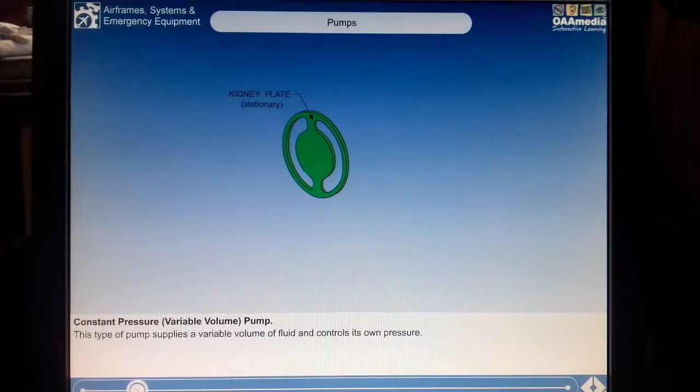The pump is made up of a number of components. There is a stationary kidney plate, so named because of the two kidney-shaped slots cut in it. The fluid supply from the reservoir enters the pump through one slot, and the pressurized fluid exits by the other.

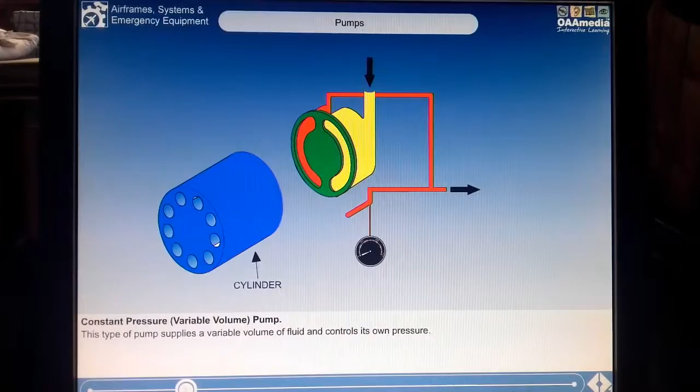The cylinder block is rotated by whichever source is driving the pump. Cut into this block are a number of cylinders. There is direct metal-to-metal contact between the rotating cylinder block and the stationary kidney plate. This contact is lubricated by hydraulic fluid at system pressure.

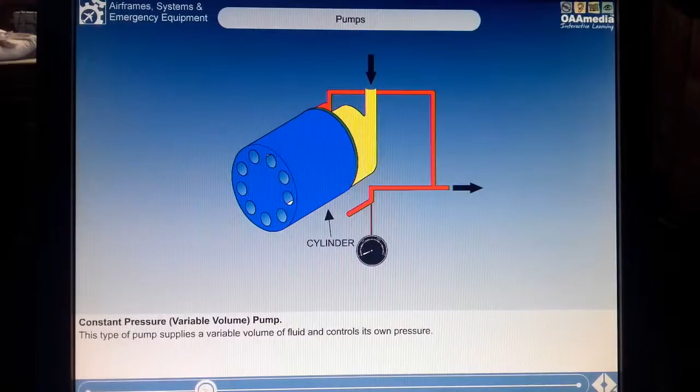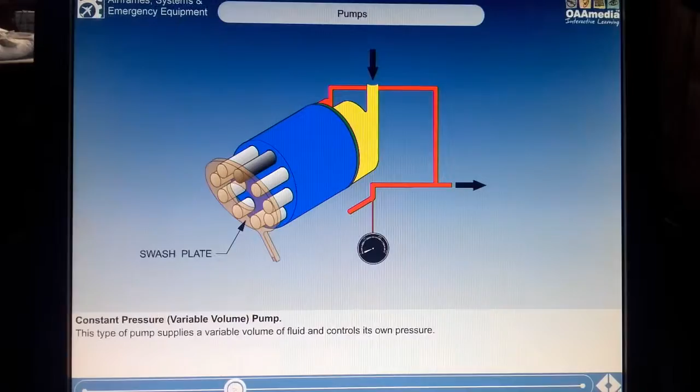Each cylinder has a piston fitted into it. The pistons are connected by shoes to the non-rotating yoke or swash plate. Again, lubrication is by hydraulic fluid at system pressure.

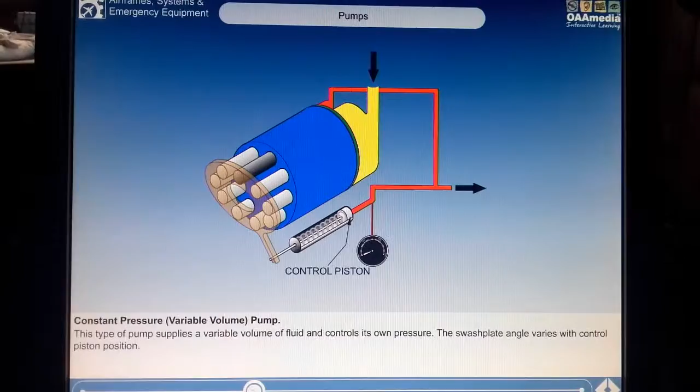The angle of the swash plate, and thus the piston stroke, is varied by the position of the control piston. The control piston has pump outlet pressure on one side of it and a spring on the other.

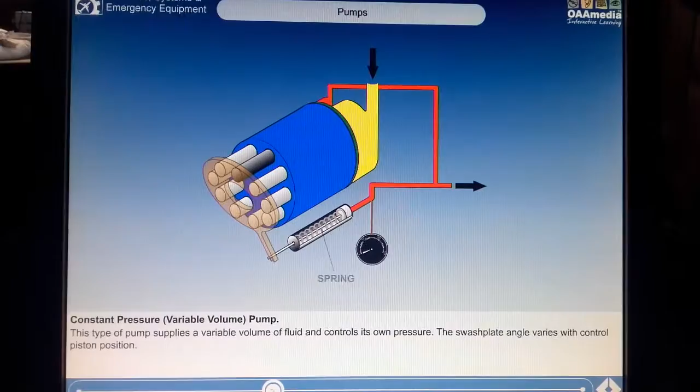With the pump stationary, there will be no hydraulic pressure, so the spring will push the control piston fully to the right, and the swash plate angle will be maximum.

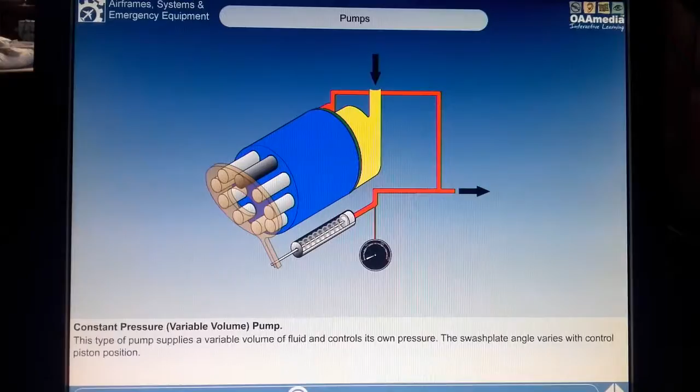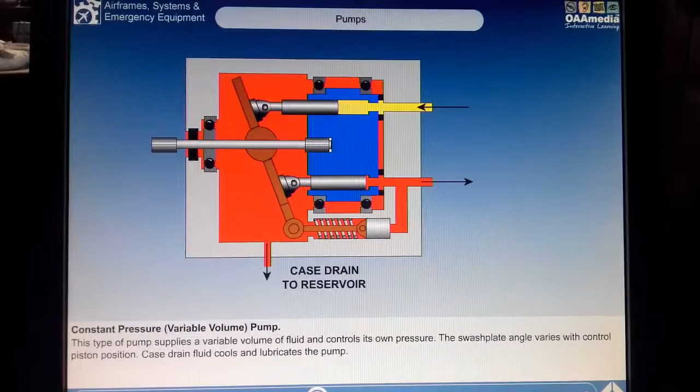The entire assembly is enclosed in a case which is filled with hydraulic fluid, cooling the pump, before it is returned to the reservoir by an independent pipeline. This oil is known as case drain fluid. The condition of the case drain filters are good indicators of the condition of the pump.

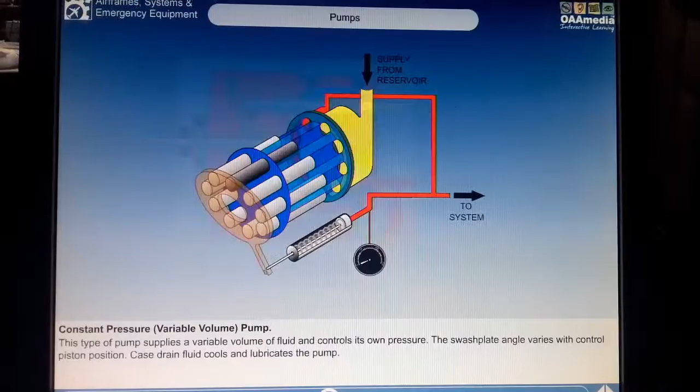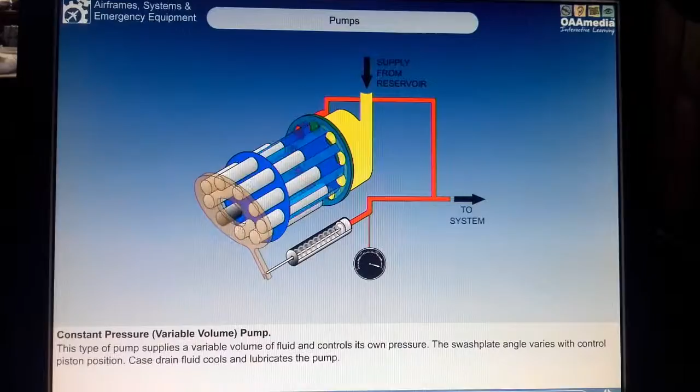As the pump starts to rotate, the pistons will ride up and down the angled swash plate, moving in and out of the cylinder block. They are moving out as they pass the inlet kidney-shaped slot, so they suck fluid in. As they move down the other side of the swash plate, they are now being pushed into the cylinder block, forcing fluid out through the pressure slot.

As pressure builds up, the control piston will move to the left, reducing the swash plate angle, and therefore the pump output.

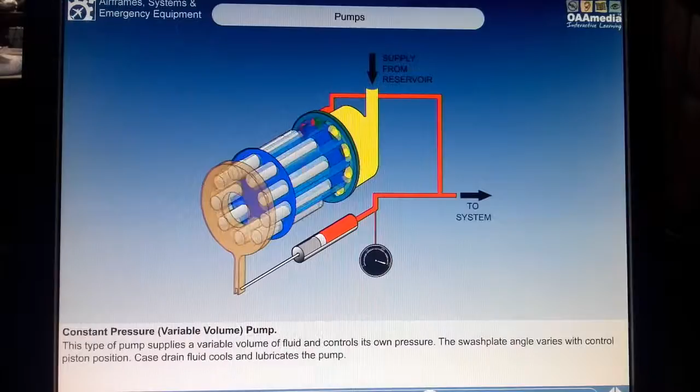When normal operating pressure is reached, if no surfaces are being operated, the swash plate will be almost vertical, the piston movement will be almost zero, and there will be only a small flow of fluid through the pump. This flow is for pump cooling and lubrication. It returns to the reservoir through the case drain return line.

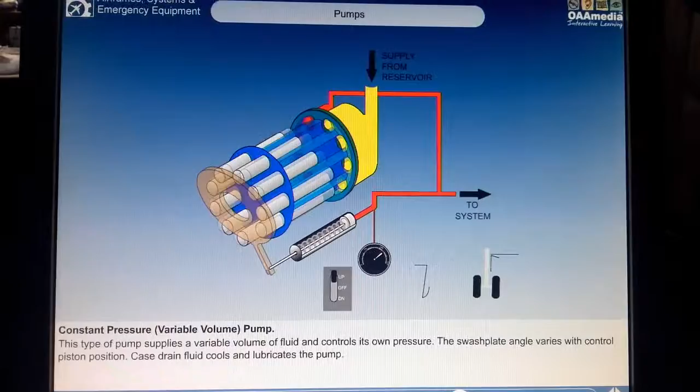If a service is operated, the system pressure will fall. The spring will push the control piston to the right, increasing the swash plate angle and thus the piston stroke. Pump output will increase to maintain the pressure.

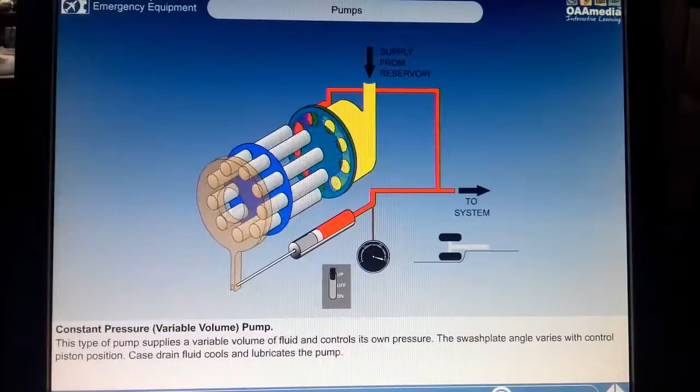When the service reaches its required position, output pressure will again rise, and the swash plate will return to its no-load position.

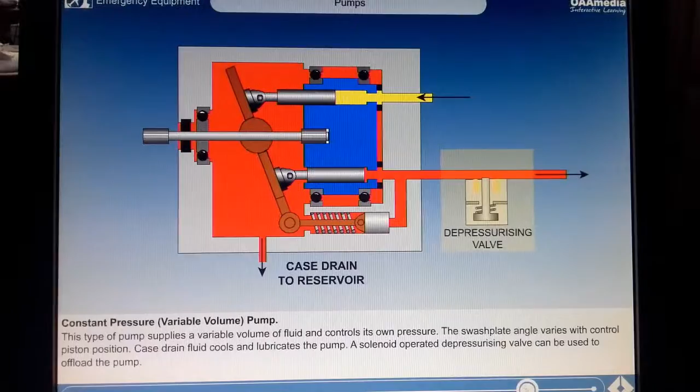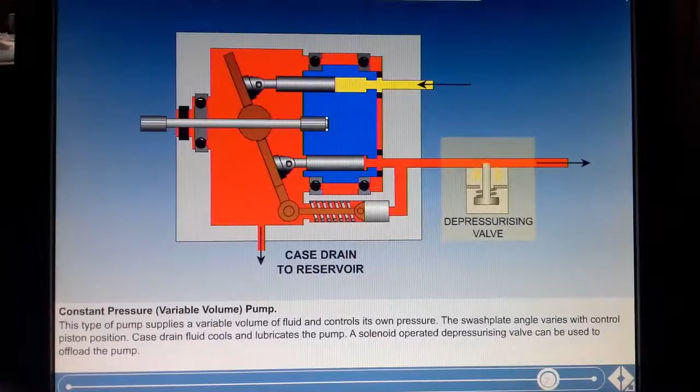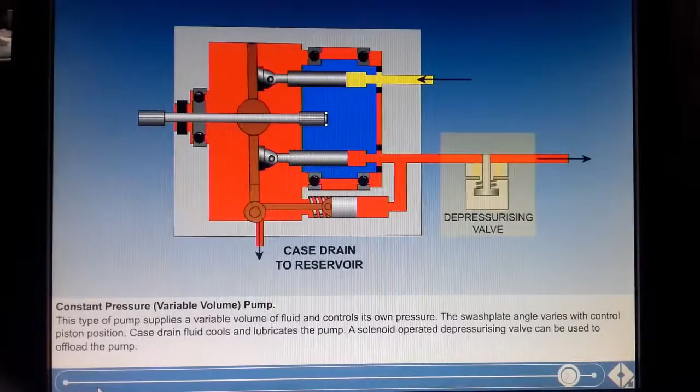On some pumps, a solenoid-operated depressurizing valve, or offload valve, can be used to block delivery to the system and to offload the pump. System pressure is maintained and the pump output falls to below 1000 psi, allowing case drain oil to circulate, lubricating and cooling the pump. This valve is useful in the event of a leak in that part of the system supplied solely by its pump.

The solenoid is energized to offload the pump, so in the event of solenoid failure, the pump will continue to operate.